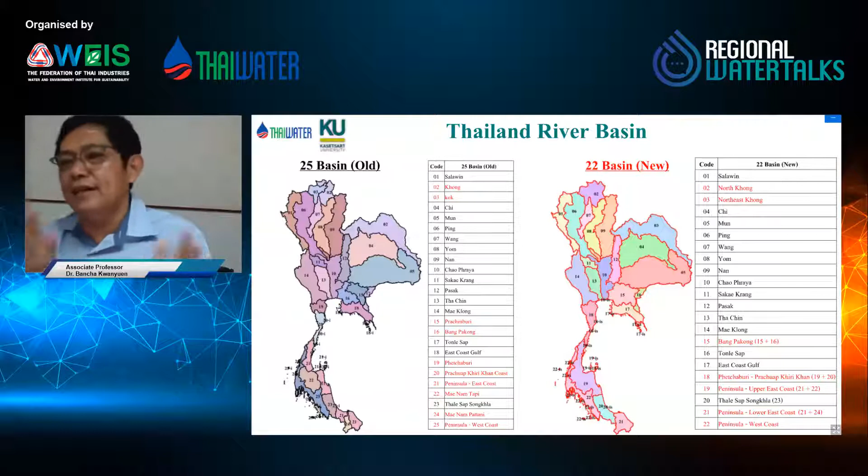The other two small basins are number 14, Mae Klong, and number 1, Salween. The Salween flows into the Andaman Sea, and 14 flows into the Gulf of Thailand. That is the new basin layout of Thailand. Okay. Next.

Yeah, I will talk about each group of them. First, Greater Chao Phraya is among the most important basins. Like I told you, it's 1/3 of the country area, and also the major production in terms of agriculture. Maybe 1/3 of the industry is here, or maybe more, and also most of the commerce in this area. Okay, and we have 4 major dams in this basin.

On the map, maybe you see on the right, on the top, that is Sirikit on the Nan River, and on the left, you can see the blue there, that is the Bhumibol Dam. Those are the 2 major dams. The capacity of Bhumibol is about 12 billion, and Sirikit is about 9 billion. That is big. And we have another 2 dams

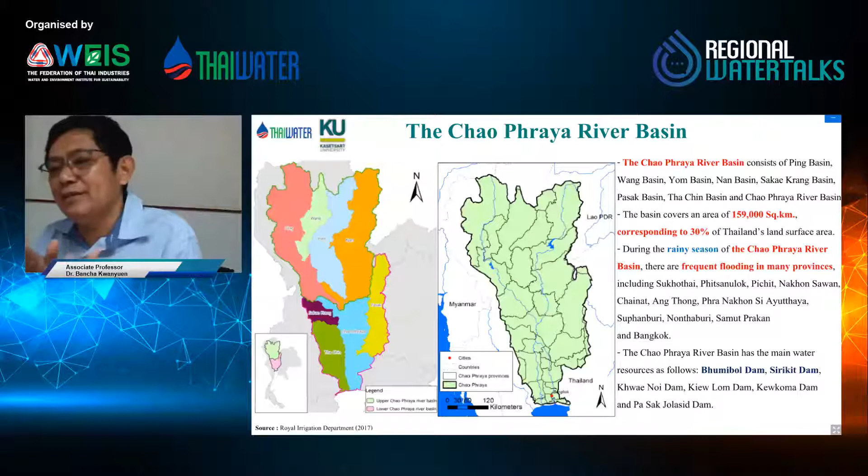called Kwae Noi. Actually, it's just below the Sirikit Dam. You can see the reservoir here, and the other one is called Pasak. It's on the Pasak Basin, on the right side of this map. Okay, so the total area of the whole basin is 159,000 square kilometers, and you can see that it's 8 major river basins combined together to be Chao Phraya. Okay, next one.

Yeah, you can see in terms of rainfall here, it's about 1,000 or a little bit over 1,000 millimeters per year. That's not so much compared to the average rainfall of Thailand, because average rainfall in Thailand is about 1,300 to 1,400 millimeters. You can see that over the 8 basins combined together to be Chao Phraya, the rainfall is not so much different. But if you have a look at the runoff, you can see that the Nan River contributes a lot.

That is about 7 billion MCM, that is million cubic meters. That's a lot. And the next one is the Ping. That is about 11 billion MCM. That is a major tributary that keeps the water. The others, combined together, still not so much water. Okay, next one, please. That is about the supply.

This is the demand side. The lower one in the brown color is the demand side, that you can compare here. You can see that the supply side comes from the Nan River and the Ping River in the north. But the demand side, you can see from the brown, on the most right hand side, on the Chao Phraya and on the Tha Chin. Chao Phraya is Bangkok actually. The Chao Phraya River goes through the heart of Bangkok, and then Samut Prakan, and goes to the Gulf of Thailand.

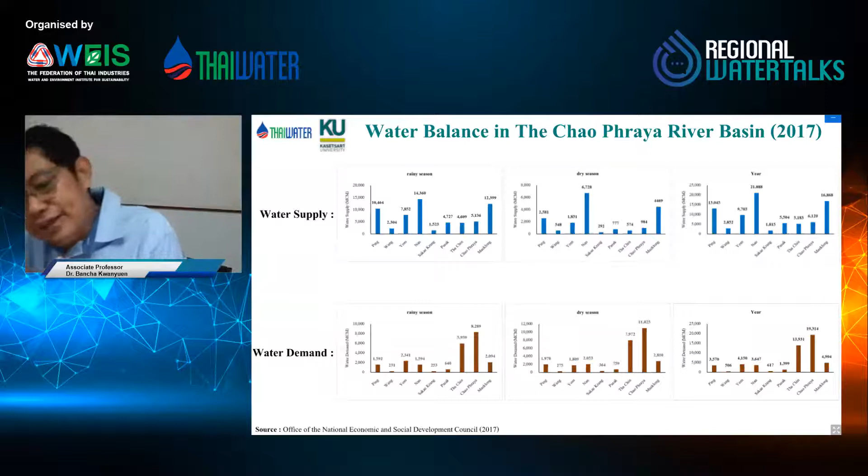And actually, Chao Phraya has one tributary called Tha Chin. It separates at Chai Nat and then goes to the Gulf of Thailand too. These two basins are the most important basins in terms of agriculture. Actually, the water use shown in this slide, around 19 billion cubic meters and 13 billion cubic meters for Chao Phraya and Tha Chin, is mostly from agriculture. I would say that 70% of this demand is on agriculture, and the other 30% mostly is on domestic water supply, on industry, and on environmental flow.

Especially during the dry season, we need a lot of water to push the salt water from penetrating into the Chao Phraya River and Tha Chin River. Okay, next. Yeah, this is about the balance. You can see that we have deficit in the Chao Phraya and Tha Chin, a lot of deficit. But how can we survive? We survive because we have the big reservoirs. That is the four main reservoirs that I discussed earlier: Sirikit, Bhumibol, and then Kwae Noi and then Pasak.

They supply the water during the dry season through the network of irrigation and the network of the Chao Phraya River, from the north to the central plain. And so we can say that the Tha Chin and Chao Phraya receive a lot of water in the dry season from the reservoirs in the north. And actually, it doesn't show on the map that one of the water supplies is from the west, that is the Mae Klong River. Sorry that I didn't show you on this map. The Srinagarind and Vajiralongkorn are another water supply that supports the Tha Chin and western side of Bangkok.

Okay, next. Yeah, next I will talk about the eastern basin. That is an important basin right now. The area is only about 37,000 square kilometers, but that is also quite big. But compared to the Chao Phraya, it's much smaller. So there are three river basins here. The yellow one there is the eastern coast, the blue one is the Tonle Sap, and let's say the brown one is

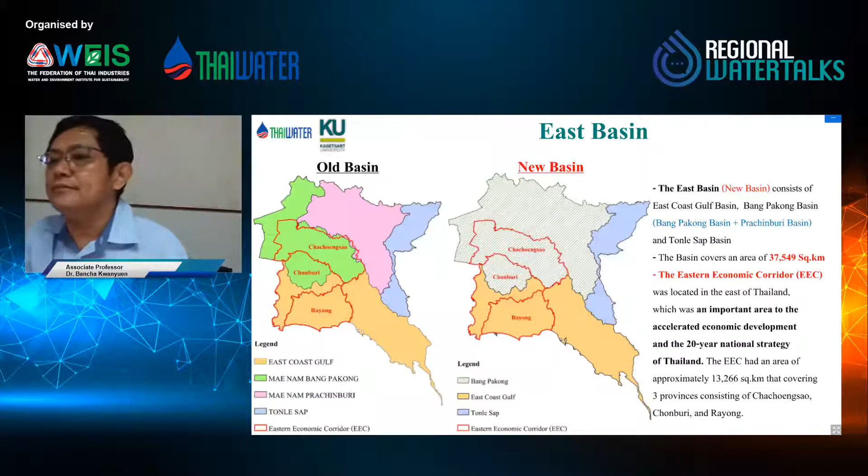This is about the rainfall. Compared to the northern or central part, the rainfall here is much more, about 1,700 millimeters per year. The eastern part, around Trat and Chanthaburi, you can see in the map that the rainfall is much more there, actually about 2,000 millimeters or maybe more. On the western side, that is Chonburi, it's about 1,000, a little bit more. Not so much, but on average it's about 1,700.

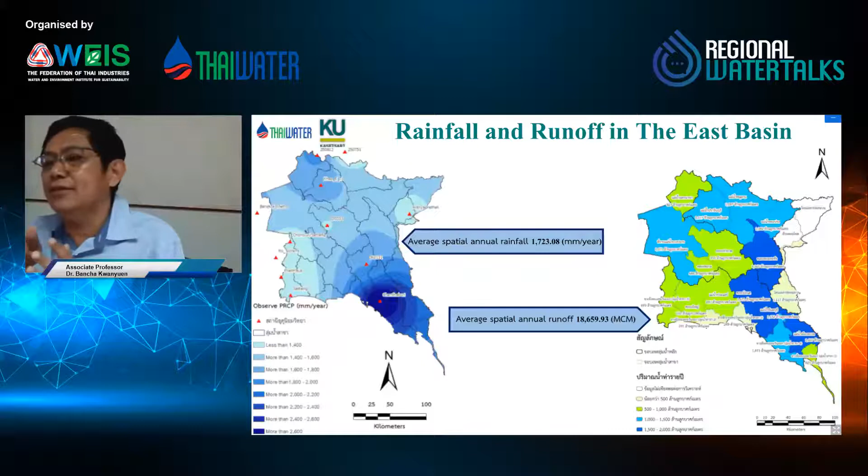Millimeter per year, and the annual runoff is about 18 billion cubic meters altogether. Next please. This is about the water demand.

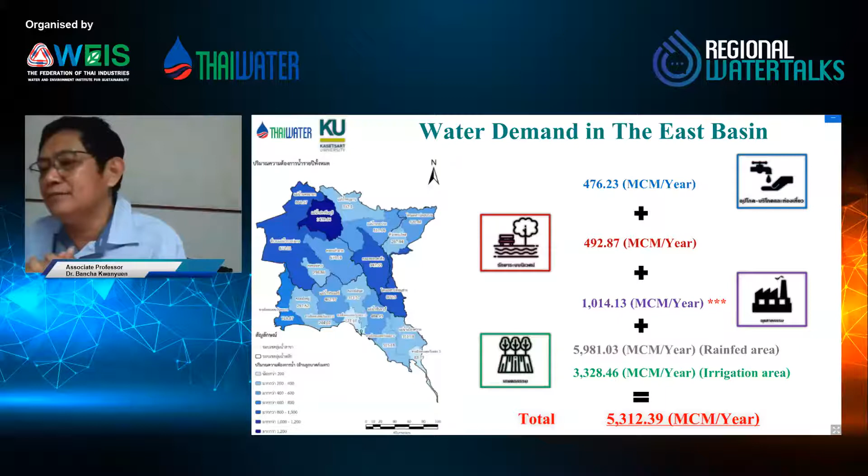The water demand here is different from the other regions of Thailand. Agriculture is about 3 billion cubic meters. Industry is about 1 billion. Domestic supply is about 500 million, and another 500 million for ecology or natural resources. So altogether we use about 5 billion cubic meters per year.

Let's talk a little more about the EEC, because I have done a lot of work on the EEC in the last couple of years. We give you some more detail here about the water for industry, the water for domestic use, and the water for agriculture.

Rayong is a good example where industry is very important. The water use in Rayong: the highest is industry, about 500 million, agriculture is maybe only 150 million, and domestic water supply only 60 million. The other one is Chonburi.

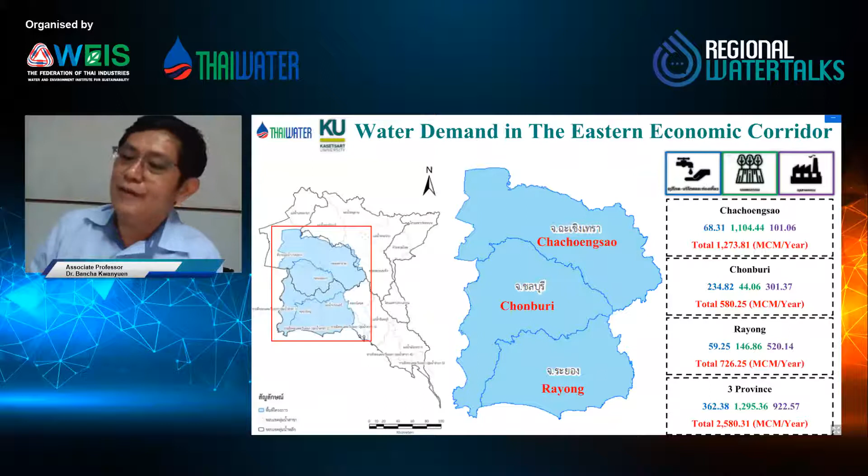In Chonburi, industry and domestic supply are not so different, 300 for industry and 234 for domestic supply. Agriculture is also less. It turns out a different story, where the majority of water use is for agriculture, not so much for industry or domestic supply, and altogether it's about 2,500 million cubic meters per year.

Okay, next please. Actually we have a little bit of water shortage in Chonburi, or let's say East Coast sub-basin number 1, that is Chonburi or Rayong, but this has been solved by the pipe network.

I'm sorry I didn't show you the pipe network here, but actually the eastern part of Thailand, the EEC area, has a very dense pipe network connecting most reservoirs together, connecting the industry area and the urban area with the reservoirs and with another river basin, diverting water from the Bang Pakong and then the Chanthaburi area into this area. So far we have no water shortage because of this water diversion.

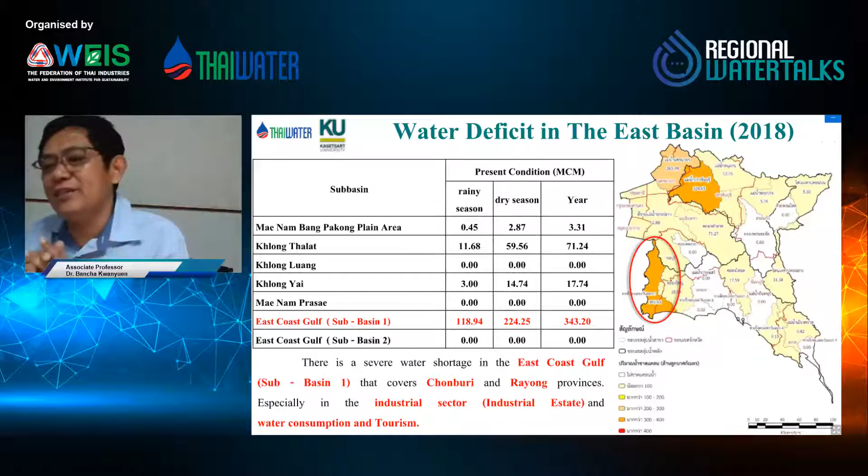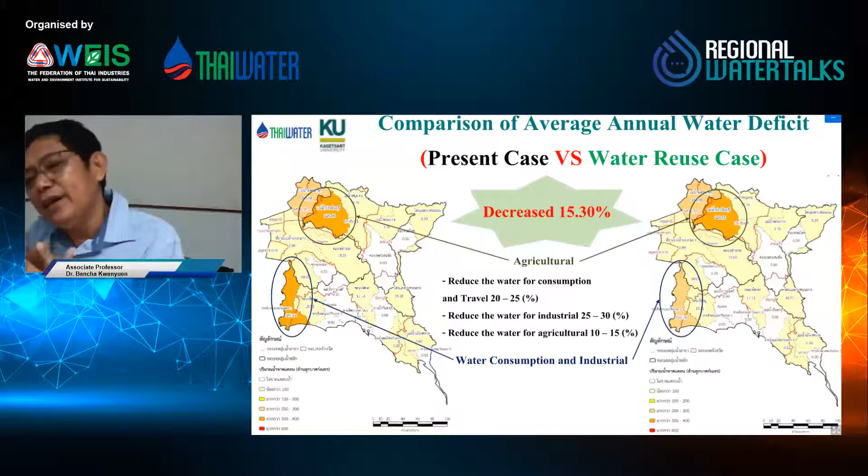Okay, next please. But what we are working on right now, we predict that in the near future, let's say maybe 5 years or a longer period like 20 years, we will have water shortage in this area. Even though we already have a plan to increase water supply, it will not be enough.

That is very important, because if we cannot do this, we have to divert more water from the nearby basins, let's say from the Chao Phraya or from Bang Pakong or from the Chanthaburi area on the eastern side of the EEC, and Bang Pakong and Chao Phraya on the western area.

In addition, if we cannot match supply with demand, desalination will be another option. We already studied that and have done work on it. So we have no problem in the next 5 years even if we cannot really reduce water use, probably desalination will be the solution. Okay, next please.

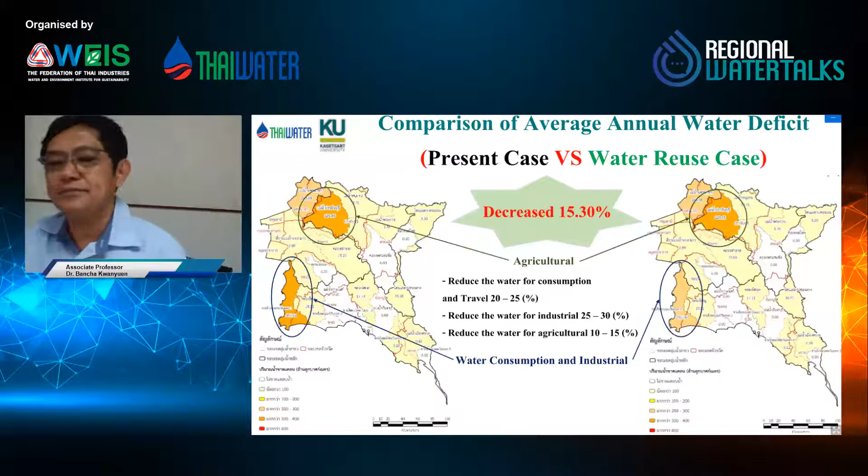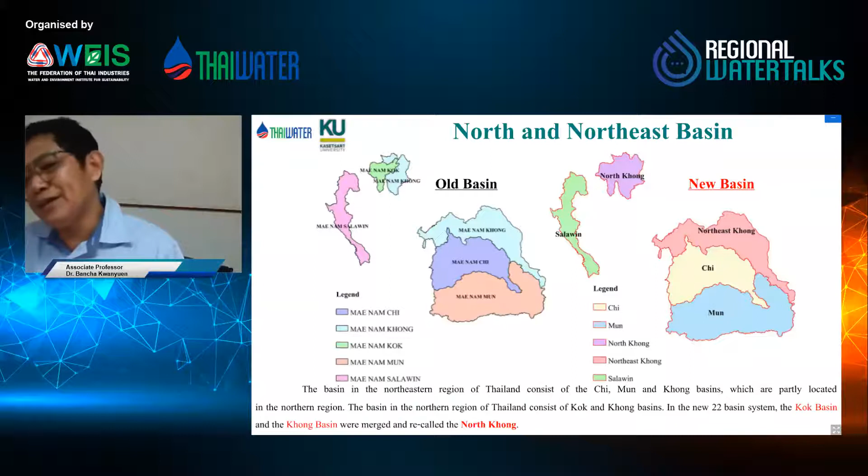For agriculture, this area is less suitable compared to the central plain and even the east. You can see the rainfall and runoff here. Rainfall is about 1,300 to 1,600 millimeters per year, and the runoff is quite a lot. Actually, you can see a lot of runoff from the northeast basin.

It's about 25 billion from the Mekong, 15 billion from the Chi, and 25 billion from the Mun. But this area has water shortage. Why do we have water shortage? Because this area is a plateau, and it's not so easy to construct a dam or reservoir.

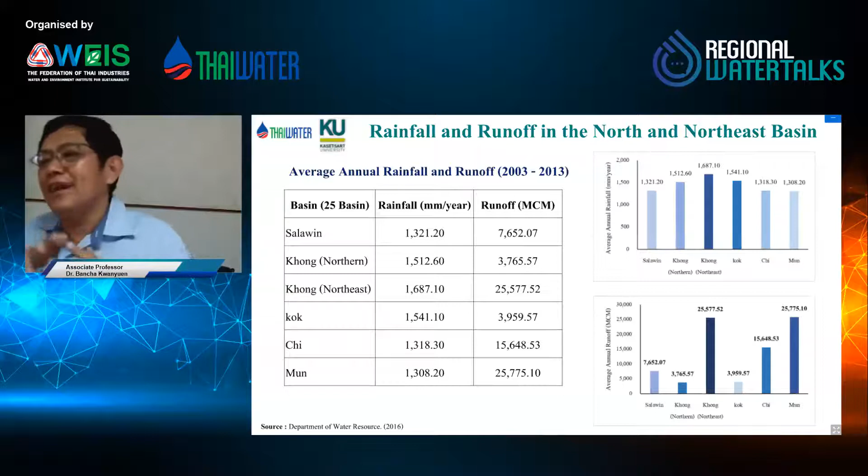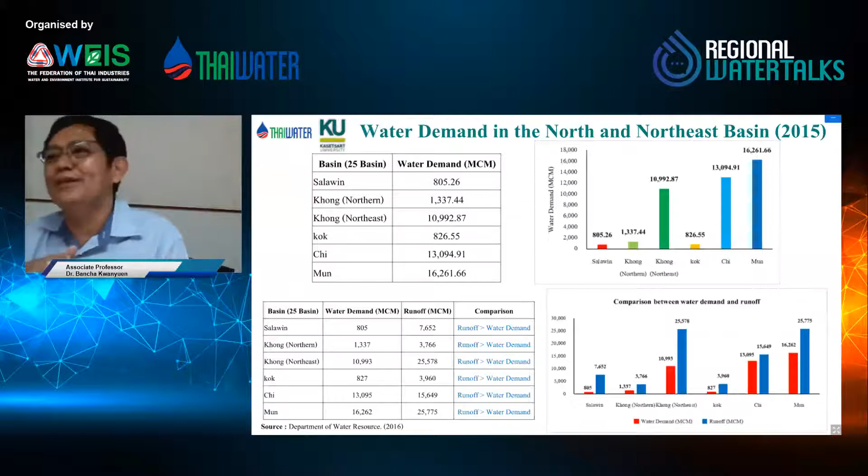Okay, that's mostly the north. I didn't talk much detail because it's mostly agriculture. Maybe most of you are more interested in industry, because industry in this area is mostly medium scale or small scale, not so much heavy industry or big industry.

Next please. The southern part is the new movement of Thailand for new industry area, because from this picture you can see from number 18 to 21 to 22, this area has good rainfall compared to other parts of Thailand, because on the east is the Gulf of Thailand, and on the west is the Andaman Sea. It connects to two oceans - the Pacific Ocean and the Indian Ocean. That's why we have a lot of rainfall in this area.

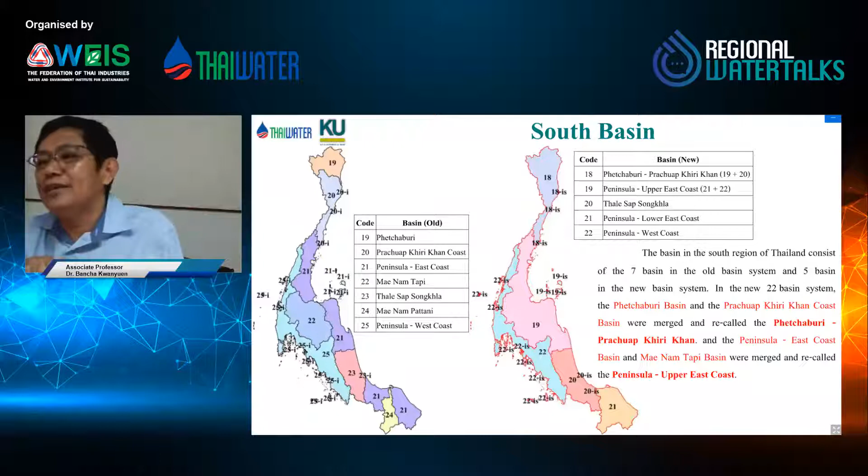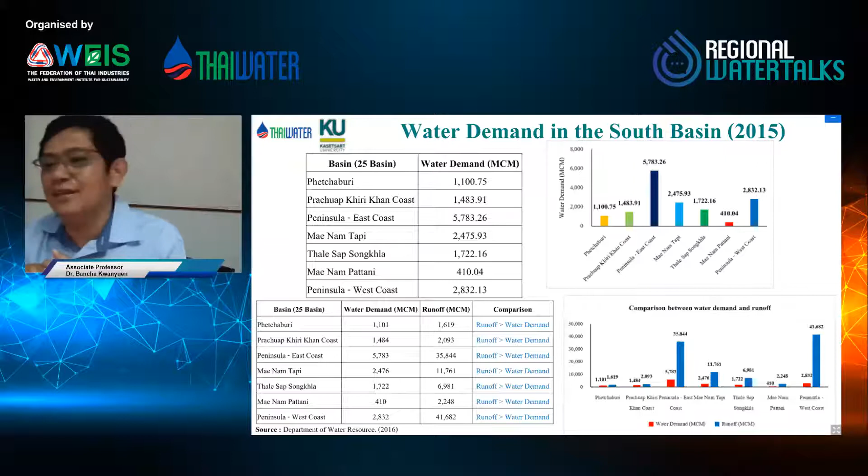In my conclusion, I would like to say that for Thailand, we try to mitigate flooding. Maybe you have heard about the flood in 2011 that heavily hit Thailand. The loss was about 1 trillion baht, something like that.

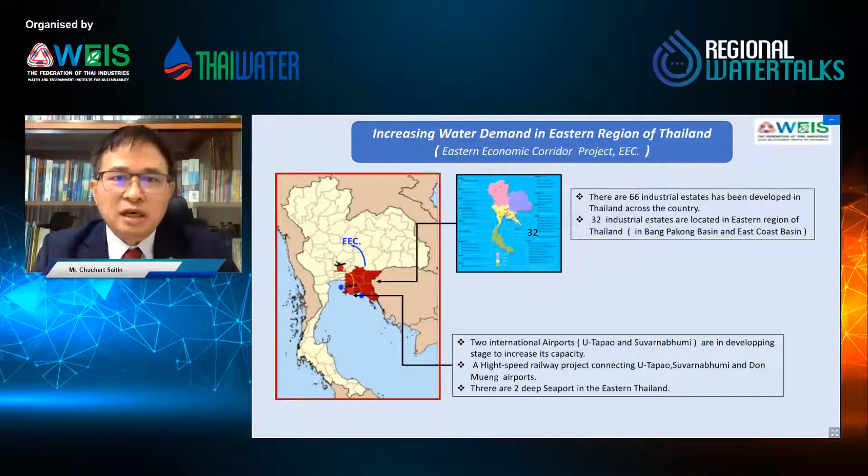This is, in my view, why the water demand in this basin will increase a lot in the near future. Please go to the next slide.

Talking in terms of the supply side, I'm talking about the annual rainfall and cycle of drought crisis in Thailand. I started working with Amata Corporation to develop the industrial park since the year 2001. Actually this industrial park started development 10 years before I joined this company, but in the year 2005, after the first drought crisis happened when I joined, it was really bad because in the middle of the year the stock of water in storage was only around 10 or 20%. It almost ran dry, but that year the rain was forecast to come another 4 or 5 months later in September.

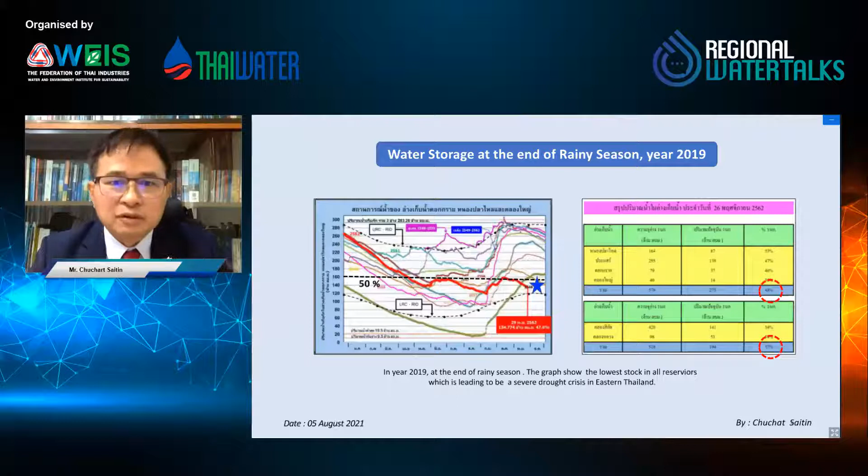You can see when we started, the amount of water in storage that could be used in the year 2020. From the beginning of the year, we can see that if we consumed water as we did normally, all the reservoirs would dry up in mid-May or the end of May. How can we manage the industry? This is talking about the whole basin.

Now, it's different for Amata, they have a water security system that I will show you in the next content. Now, for the whole basin, the reservoirs would dry up around the end of May, but we predicted that the new rain would come around August or September. So how do we get through this period?

So the way we did it in the year 2020, at the beginning of the year, was to reduce pumping water from all reservoirs, which reduced the water supply to all industry by around 10 to 20%. That is the way we managed the crisis in the year 2020. So this is just to understand how serious the water crisis impact on industry is. Okay, next slide.

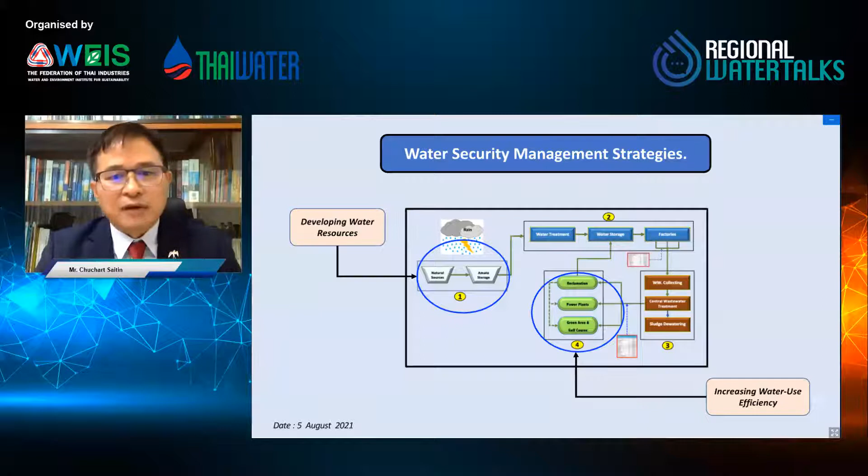Second, as Dr. Bancha told in the previous presentation, the way to have more security in the eastern part, but with water demand driven by the many projects from the government. So we have to survive by increasing water use efficiency in the industrial park, which I will explain next. So next.

The first strategy, the water resource development plan. In the water resource development plan, we study the kinds of water sources that we can develop for industry. The first one is surface water, with the lowest cost of water use. Second is groundwater. Groundwater is very, very limited in quantity in eastern Thailand. Studies found only a big basin in the Ban Khai district that is not developed yet.

Third is room to increase use efficiency, which we are using at this time. The last is the water security system, the desalination system, which is under investigation and study by the government sector, seawater desalination, to provide the highest security for all sectors in eastern Thailand. Next.

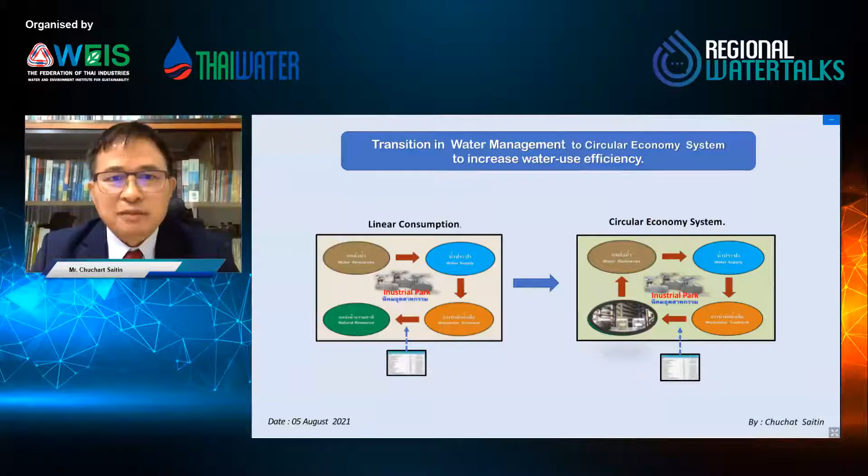When we were thinking about how to provide high security of water management to all investors, we changed the system into a circular economy system, where we collect all the treated wastewater to the wastewater reclamation system, at the reverse osmosis membrane system. And this system will produce water back to the industrial park again. Next slide.

We studied the records and statistics over 10 years, and we found that in Thailand, in two industrial estates, all wastewater is collected by the central collecting system. We found that the amount of wastewater is 44 to 58% in Chonburi, and in the Amata Industrial Estate in Rayong it's almost the same, 44 to 61%. The kinds of industry are automotive, electronics, and some like coating. The amount of water discharged from the factories is on average 50%, which goes to the recycling system. Okay, next.

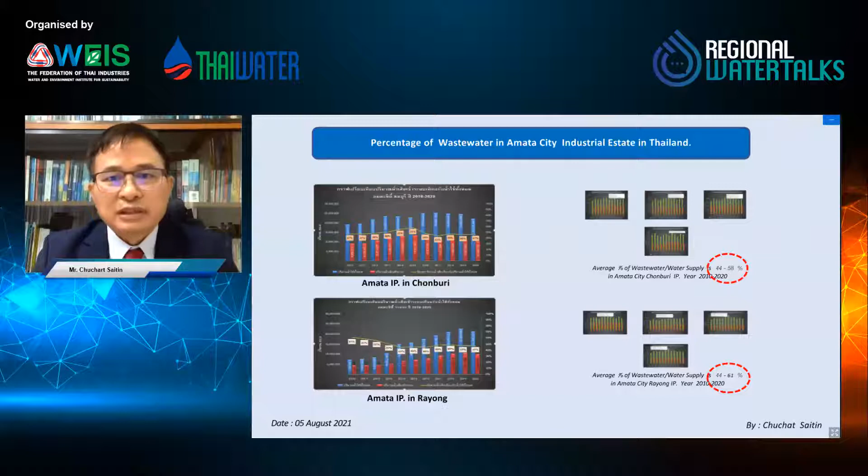In the wastewater management system, in an industrial park it is easy to manage all the factories, because all factories that invest in the industrial park have the same system. They have to design the factory to separate the rainwater from the used water that we call wastewater. All wastewater will be designed to be collected and discharged at only one point to the central water system. This design and construction is controlled by the Industrial Estate Authority of Thailand, that we call IEAT. So the design has to be approved before getting the license to operate.

When operating, Amata will have a system to do random sampling and check the discharge quality before they discharge to the central collection system. This is to ensure that all the wastewater is controlled to meet the requirements of the central wastewater treatment system. We design the whole system to handle the quality and treat until it meets the standard of water discharge to the public canal. And then we recycle this water to the cooling system in the power plant and to the green area in the park. The rest goes to the RO reclamation system and is supplied back for industrial use in production. Okay, slide.

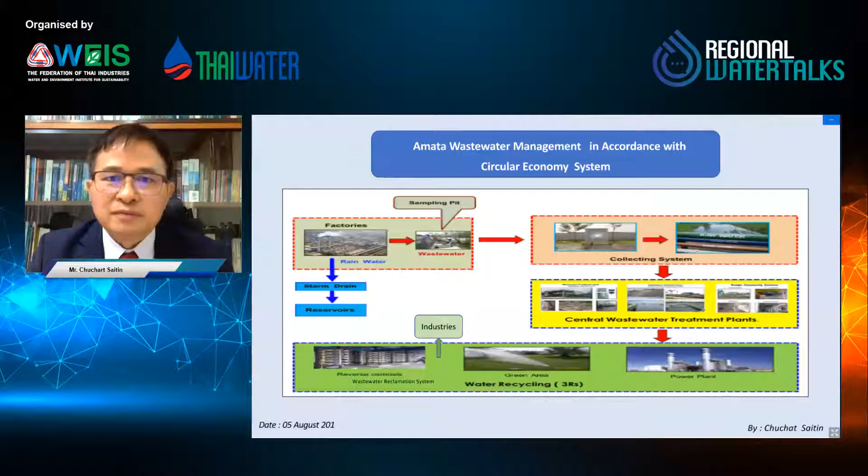Then this part is increasing capacity, the efficiency of water use, the reuse by integrating wastewater from the central wastewater system into the green area, the cooling system in the power plant, and then the reverse osmosis reclamation system, supplying high quality water to industrial use. This is the system that we plan to do. Please go to the next slide.

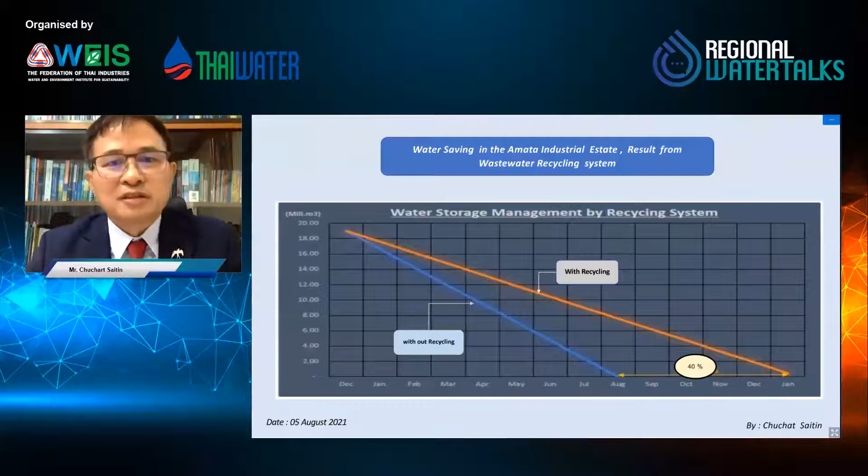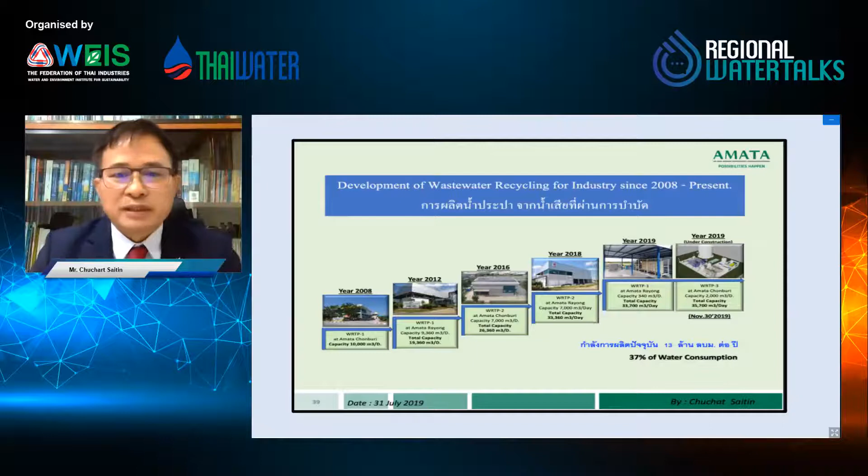So far, Amata Industrial Estate has 5 water recycling plants with 13 million cubic meters per year, and 37% of water consumption is for industrial use, but another few percent is for recycling to clean air and cooling systems. We will have about 40% saving. Okay, next.

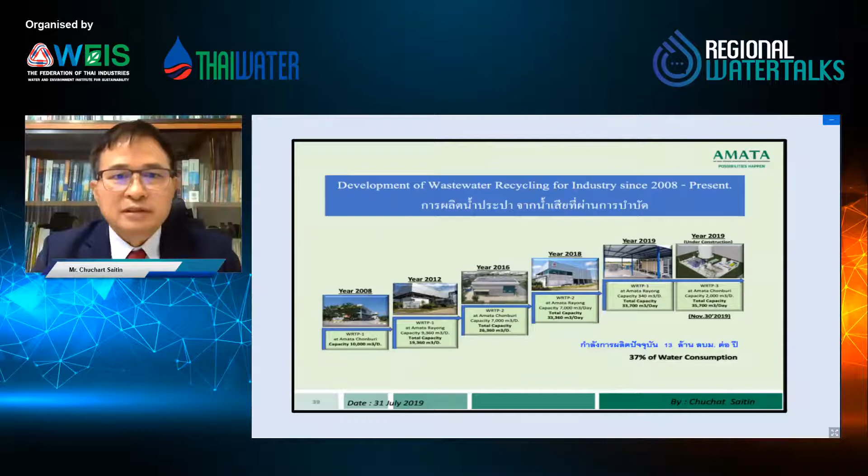This is the model I just presented to the subcommittee of the House of Representatives for Water Crisis Management in the Eastern region of Thailand, to find the solution to the water crisis on the east coast of Thailand. As Dr. Bancha said, we need collaboration between the private sector, government sector, and all sectors, including agriculture, domestic consumption, industry, tourism, or whatever. They have to be aware of the water crisis, its cycle, and how we can overcome that crisis.

Water usage efficiency improvement is one key success factor of the solution for the water crisis. Because water desalination has a high cost, it actually consumes around 4 times more electricity. Recycling water needs around 0.8 to 1 kilowatt hour per cubic meter of recycled water. But in seawater desalination, as I have the experience of visiting Israel, Singapore, Australia, where they do seawater desalination, the average is around 4 kilowatt hours per cubic meter of desalinated water. So we have to improve water usage efficiency before we go to the seawater desalination system.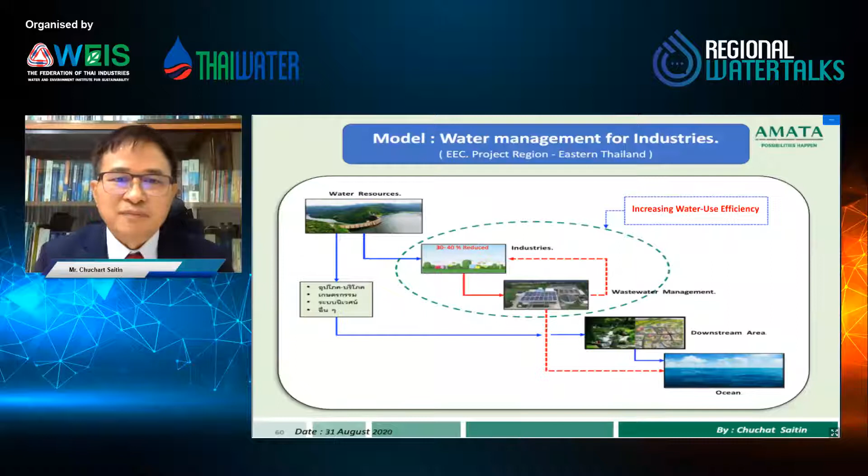I think it's coming to the last slide for mine. I just want to tell you that we have the highest security system by the government. The government has the official water resource body, the National Water Resource Agency, to manage the overall policy of water management in Thailand. And we also have the subcommittee to find how to do seawater desalination in Thailand for the highest water security in the eastern part of Thailand, to support all the projects the government has done, such as developing the seaport, increasing the capacity of the international airport, and the high speed train to the airport.

All this is driving the demand, but we have to make sure of the mitigation plan to overcome the crisis by improving the efficiency of water usage in all sectors. Agriculture, we have to reduce the losses in the distribution system. Industry, we have to do the 3R system and the circular economy to reduce water consumption. The private sector has to control the discharge of wastewater to water resources that can contaminate the source of water and reduce the supply capacity.

Because when we look at water supplies these days, it's becoming less and less obvious that there's reliable access to fresh water. There's already 4 billion people that face water scarcity today, and this number is only growing.

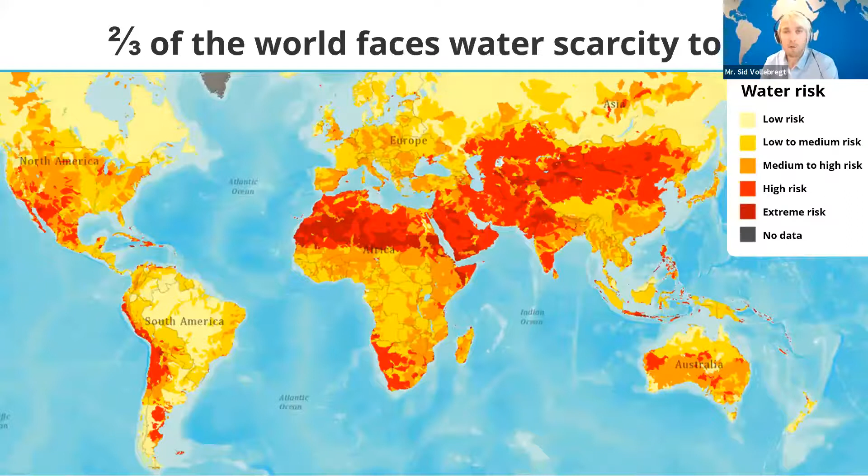And to me, access to water is the biggest challenge for humanity in the 21st century. They don't call it the oil of the 21st century for nothing. And it has to do with the increase of population, of course. We have more people that want more water. They drink more water, but it's also in the food that we consume. So basically food is 70% of our water footprint.

To grow the coffee beans that we consume in our coffees, or to grow the wheat that is eaten by the cow to be turned into meat. So it's not only the water we consume, but it's also the food we eat, the clothes we wear, the energy we produce, and all the products we have.

Well, currently, we use around 4 times the natural water cycle to provide all the people with enough water. So that means that all our natural water reserves are highly under pressure. Aquifers are dropping and salinizing, and wetlands are quickly disappearing. And that's a big issue.

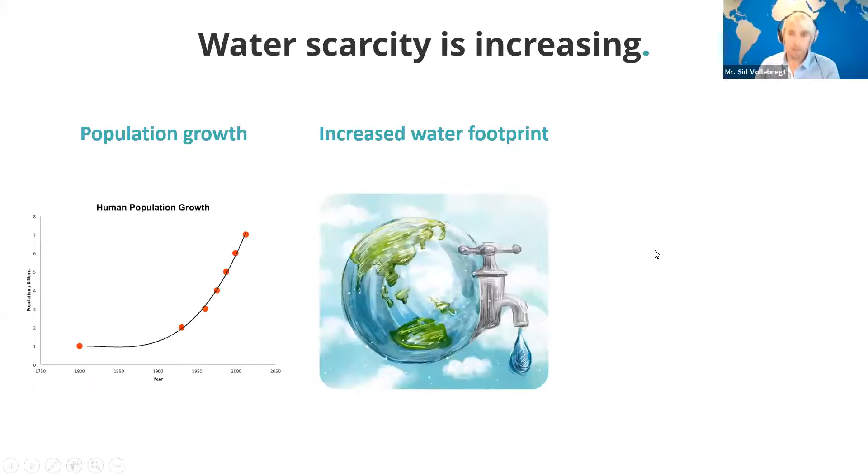And last but not least, there's also climate change that changes weather patterns. So we have longer droughts, and we have very strong rainfall in a short period of time, leaving the earth unable to capture this water. And these 3 trends together make water one of the biggest challenges for the next decades.

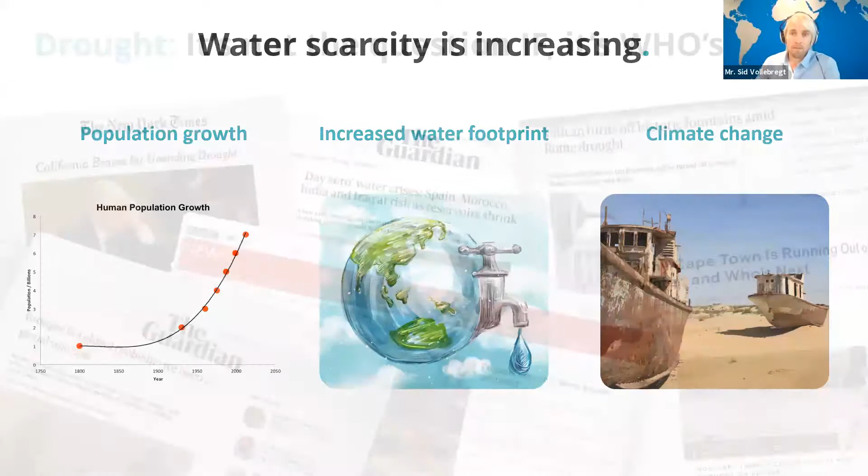But of course, this doesn't portray itself directly on people. But when you think about how people are involved in this global phenomenon, it's often these kinds of news headlines that make it evident that these days it's not a question anymore if there's going to be a drought in the dry season, but it's really who's next.

So there's always California, there's the Horn of Africa, there's the south of Europe, Taiwan has been hit recently, there's Australia, there's a lot of regions in Asia that are very pressurized when it comes to the water supplies.

But fortunately for us, if we look at the water availability, 70% of the earth is covered by water. From all this water, only 3% is fresh water. This means 97% of all the water is salt seawater. So looking at these numbers, we believe that the key to extra water resources partly lies in the sea. And this brings us to desalination.

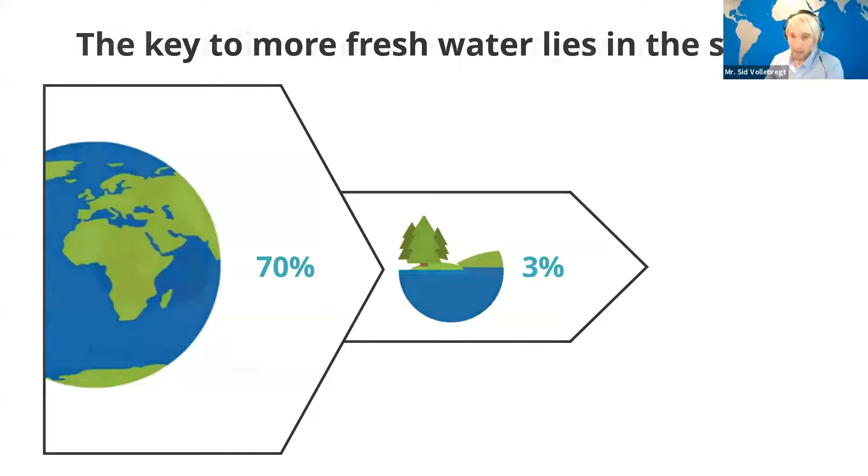And desalination is nothing new. It's been done for decades, but it's considered expensive because it's a very energy intensive process. And when energy is expensive, the water automatically becomes expensive. It's a process that has the perception of being fossil fuel driven, a bit dirty, because when we use fossil fuels for desalination, this also means we are accelerating water scarcity by increasing droughts. So we find ourselves in a vicious circle.

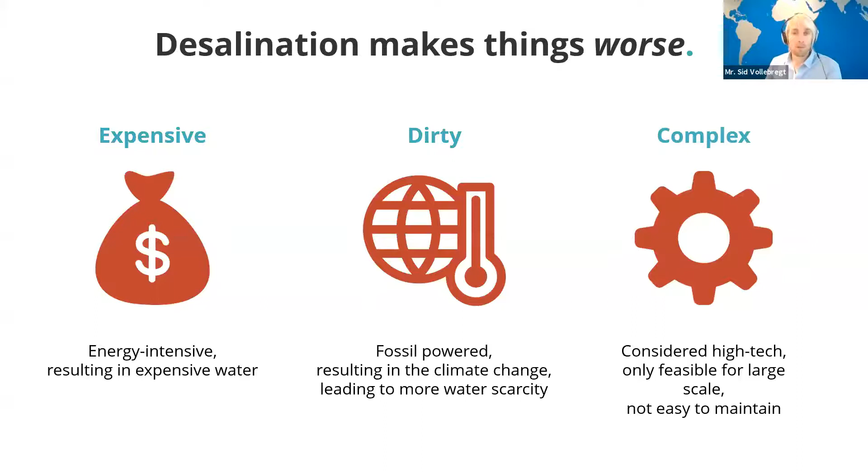And last but not least, it's also a process that's considered to be very complex, only feasible at large-scale factories in, for example, the Middle East, not being easy to maintain by smaller projects or local communities. And these really are the 3 challenges that we as an organization took, and we asked ourselves, how can we get fresh water today without limiting tomorrow? So this is the origin, this is the philosophy, these are the grounds of our organization.

And what we did is we developed new desalination technology that makes turning seawater into freshwater much more efficient. So when desalination is mentioned, we talk about reverse osmosis, which is the most energy efficient membrane-based process. It works by putting seawater under a high pressure, 50 to 60 bars, and then having fresh water being generated as the H2O molecules travel through the membrane.

For this process, conventionally and traditionally, you need around 10 kilowatt hours for a cubic meter. And that's a lot of energy, of course. What we did is we reuse the salt water flow. So there is seawater coming in the membrane, there's clean water coming out, but there's also a saltier water flow that is still present, that is still pressurized, that also goes out and goes back into the sea. This is called the brine flow.

And this brine flow still contains the 50 or 60 bars of pressure that you originally put on the membrane. And this energy we reuse using an energy recovery device, abbreviated as ERD in this picture. And by doing so, we are able to use 70% less energy. So we reuse the saltier water flow, we take its pressure, we provide it to the pump, kind of like a turbocharger. And this allows us to use only 3 kilowatt hours for a cubic meter of water. So that's 70% less energy.

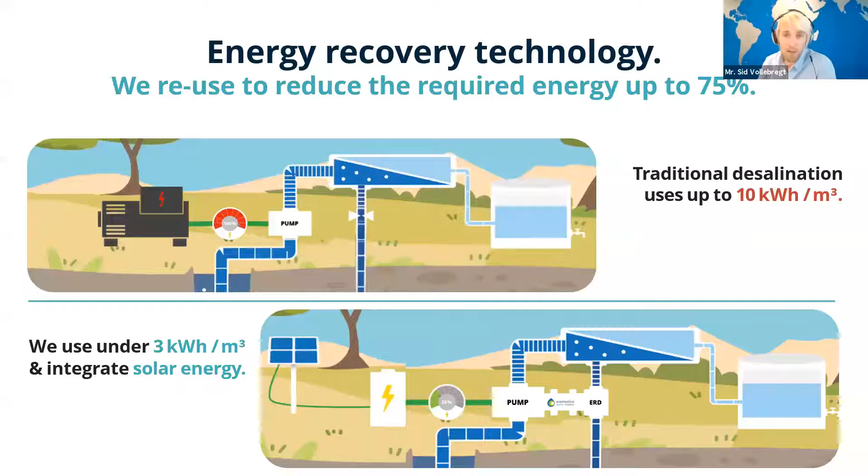The second step we do is we integrate this water treatment process into the fluctuating nature of renewable energy such as solar energy. So we are able to use the sun with a small battery bank to power this desalination process in off-grid locations. And due to this innovation, we also need 70% less panels.

That's what makes a major breakthrough, which makes fresh water at coastal locations possible for everybody these days. So what we offer with our solar desalination technologies is, first and foremost, water at lower expenditure. When you have to transport water, it can be very expensive, so what we do is generate water on site at lower expenses, and we make sure it's produced in a sustainable fashion using solar energy.

Reliability is very important because you cannot operate a resort, an industry, or have a community or private property without water, so reliability is of utmost importance. And it has to be easy to maintain using remote monitoring and durable components - really high grade, not RVS steel because it erodes away within a year, but titanium pumps or 904L, robust materials. Durable components, automation and remote monitoring together are the key for a long-term and sustainable project that saves on water expenses.

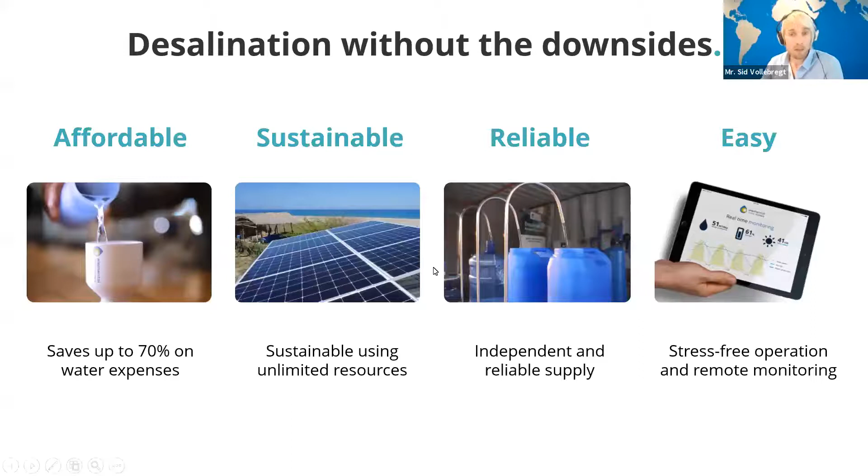So we think there's really a big opportunity here that we are happy to jump onto with the right local partners. When we dive a little bit deeper into the technology, we have 3 types of solutions that we can deploy, generating between 3,000 and 500,000 liters of water per day - that's 3 to 500 cubic meters of water per day. That's the sweet spot that our organization operates in.

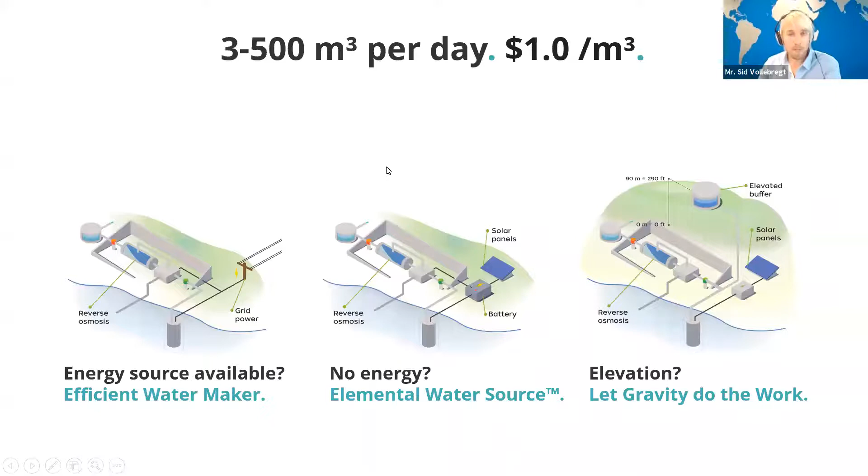We don't do larger plants and we only do seawater desalination, so only coastal applications. For these kinds of numbers, you talk about roughly $1 to $2 for a cubic meter of potable generated drinking water - that's the range of investments you have to think about for all of these solutions. So we have 3 different solutions that we deploy, let's zoom into them quickly.

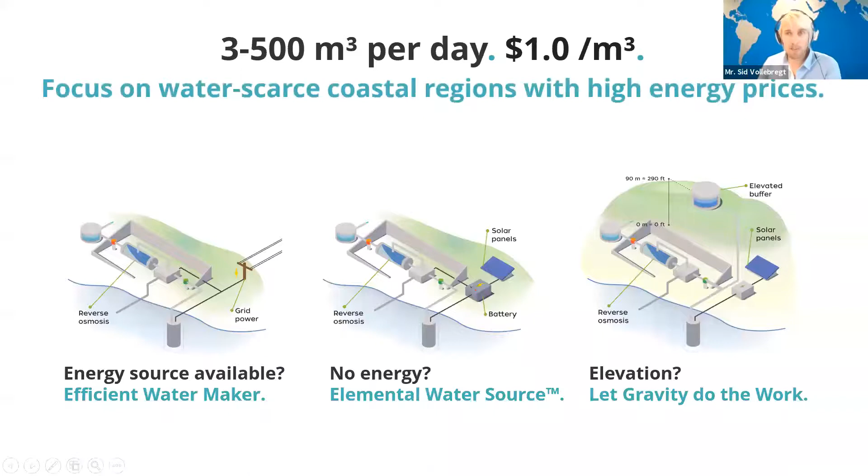They're all in water scarce coastal regions, and the payback is shorter if energy prices are higher. The first solution is only the water treatment part, the efficient desalination range we have, and here we deploy containerized or skid-built units. In the picture you see, for example, a project of 90,000 liters per day, the desalination device and remote monitoring. They only use 2.7 kilowatt hour per cubic meter.

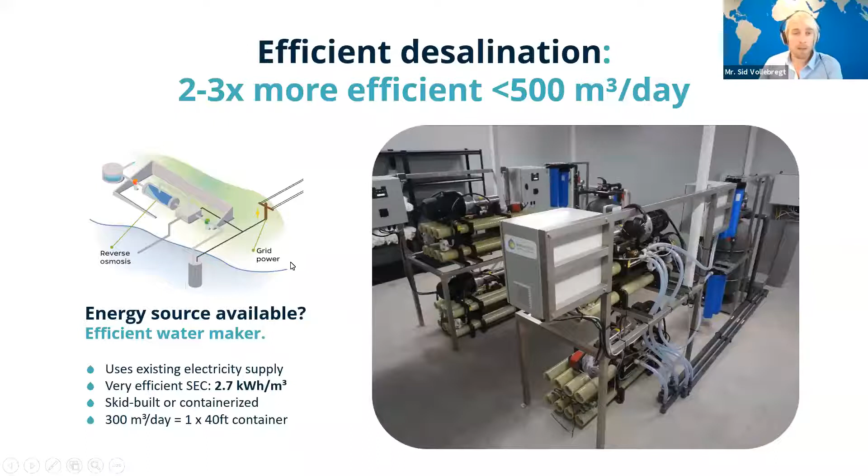This uses the existing electricity supply of the client. So if there's a resort, a community, or a private property that already has reliable and affordable electricity, these are the units we can deploy - either skid built or containerized. We can do 300 cubic meters per day in a 40-foot container.

Comparing the economics to conventional desalination, which has the perception of being expensive, here you see 2 lines of the investment required, over time. The conventional desalination systems have a little bit lower investment required, but because of the energy required, the operational expenses are quite high. Looking at our system, the light blue line, the operational expenses are much lower, leading to short payback and strong savings over time.

You see that represented as well in the water tariff. If you calculate these numbers over 15 years, the amount of electricity for the traditional systems is much higher, so you're looking at $4 per cubic meter. But with our system, we're below $2 per cubic meter. And this is for a system of 10 cubic meters per day.

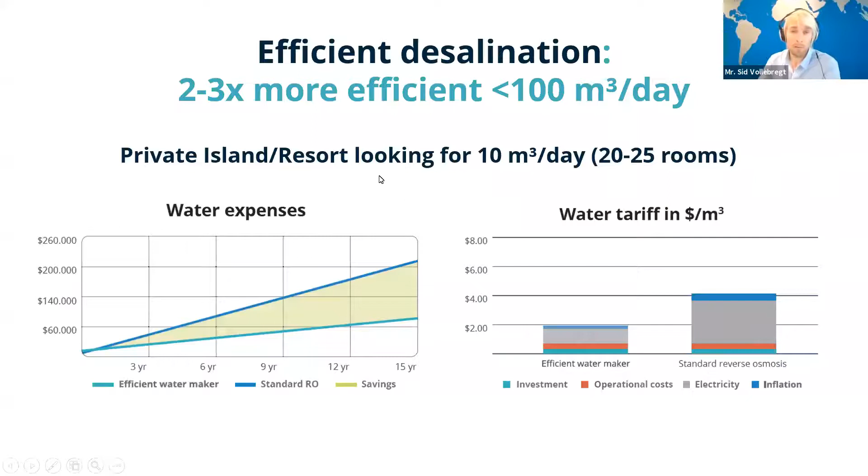This, for example, makes 90,000 liters per day for the guests. And it saves the client over 60% compared to a previous water supplier. So that's, of course, reliability, sustainability, and then also savings all at once.

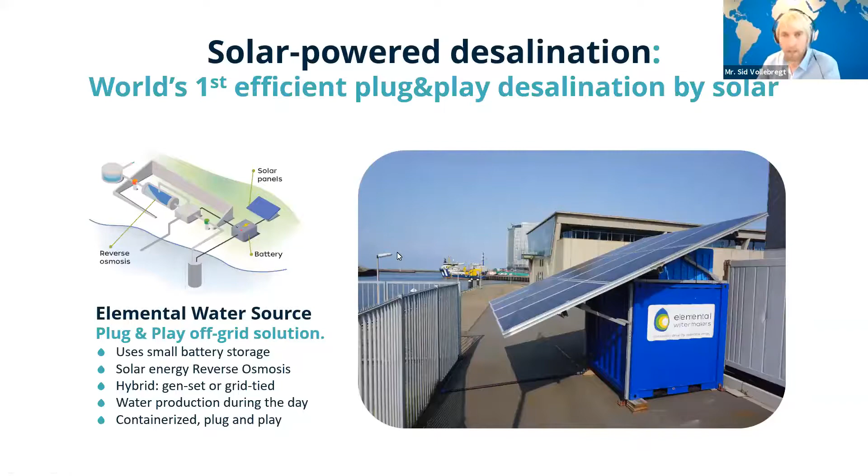And I brought a little video with me that shows you a little bit more about this process. So let's take a look at this video.

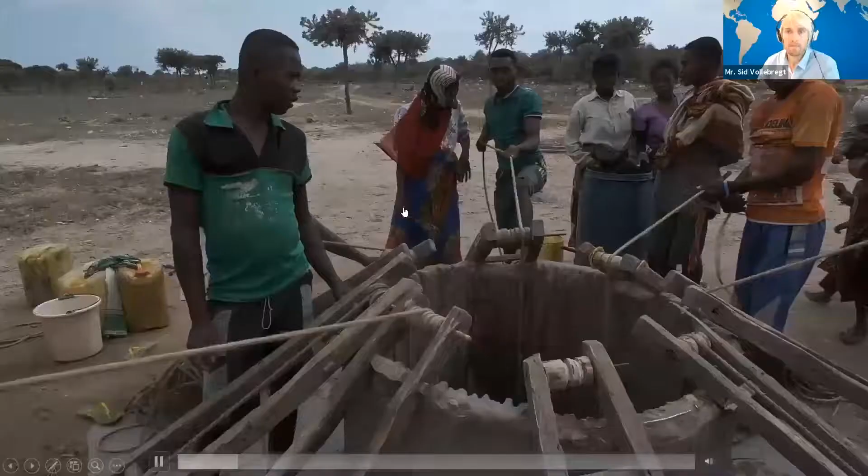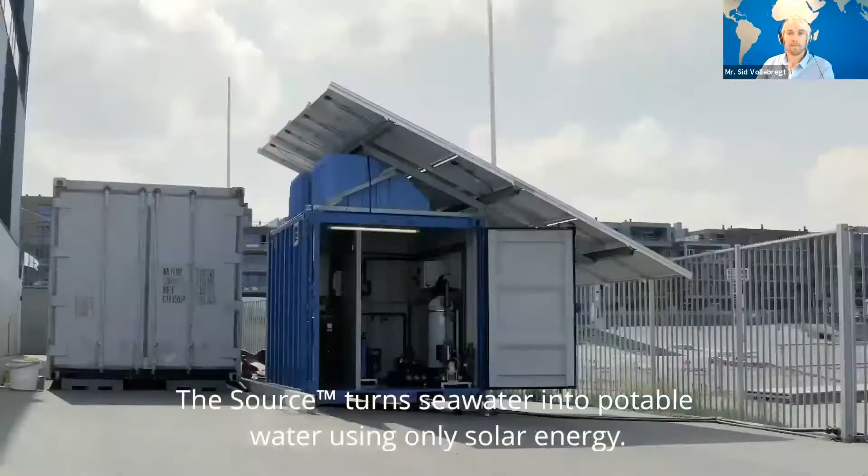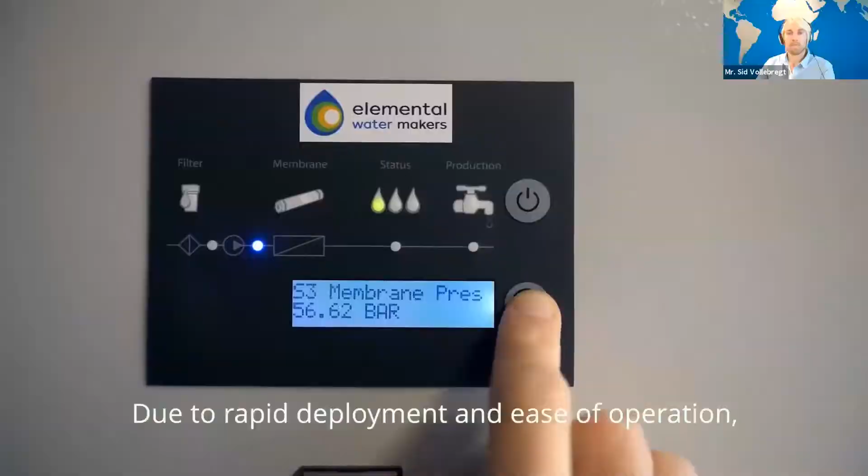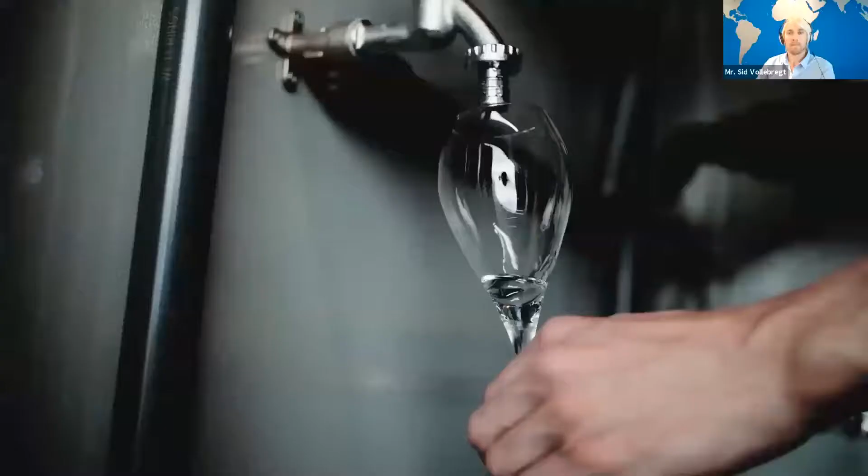Water is the source of all life. However, fresh water is getting more precious by the day. Many islands and coastal areas are facing water scarcity. How do we ensure sustainable access to clean water? At these coastal locations, there are two elements abundant: the sun shines over the vast ocean. This is where the elemental water source makes the difference. It offers an easy-to-deploy water solution for any off-grid location. The source turns seawater into potable water using only solar energy. It's the world's first efficient solar desalination solution suitable for quick deployment. One elemental water source provides sufficient water for off-grid users, such as communities, resorts, industries, or private properties. Due to rapid deployment and ease of operation, it's also the perfect water source for emergency response and disaster relief. It uses 3 times less energy than traditional desalination by unique energy recovery technology. This ensures that the water can be enjoyed at an affordable rate. Tap into the elemental water source and ensure clean water for generations to come. Join us in solving freshwater scarcity using only the sea, sun, earth, and wind.

So this elemental water source is a containerized off-grid solution. It finds suitable use in off-grid locations, such as for a community water kiosk, but also for temporary applications like in emergency response situations after a disaster or a cyclone has hit.

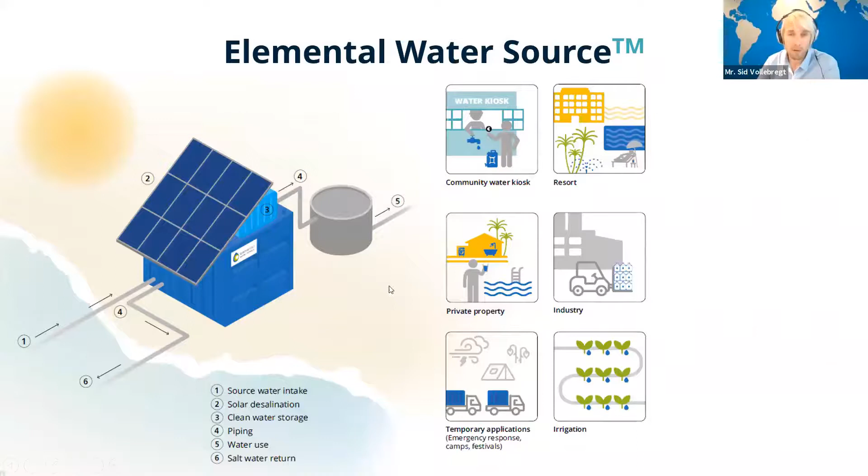It is possible to quickly deploy these units, but of course for other off-grid applications such as private properties, resorts, industries, or irrigation, this is also a very suitable solution, as long as there's access to the sea. As I mentioned, they come pre-built, pre-mounted in a small container. Of course, it really depends on the size of the water demand for the clients.

So we can do small-scale systems like 5,300 liters per day. They come in this 8-foot container. But of course, as the water demand increases to 10, 20, or 40,000 liters per day, also the size of the container increases. So all we need to know for the location is really how much water they need and what their location is.

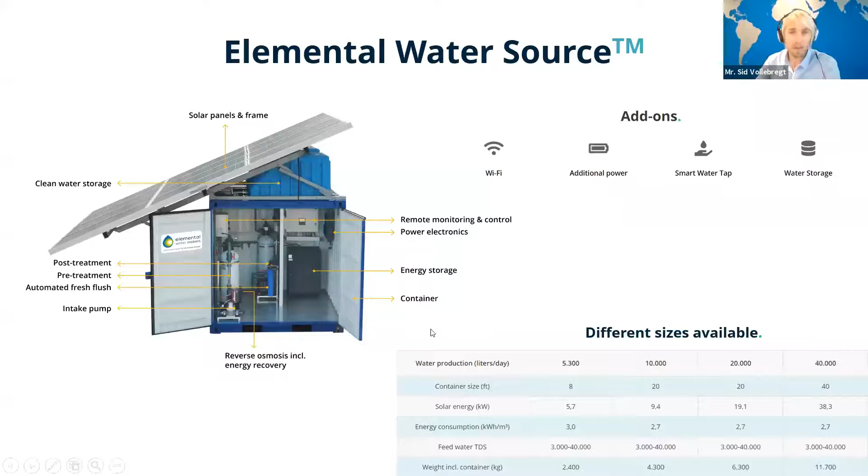This allows us to really quote a custom project, design a custom project, taking into account water quality parameters, the usage of the water, but also the local solar radiation. So this produces water, but this can also be extended with additional power for energy appliances, smart water taps for distribution, water storage we can implement, and also Wi-Fi. So this is a very nice application for off-grid locations.

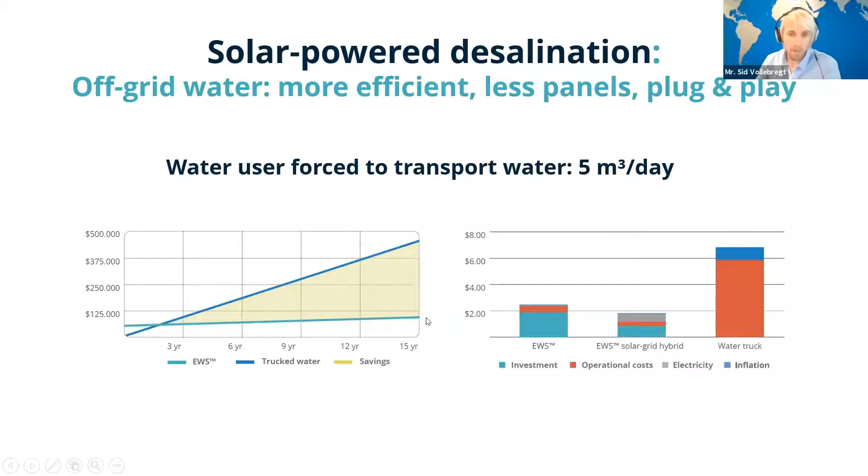As I mentioned, it's mostly for places that are now receiving trucked water, for example, through water trucks or boats, or places whereby people are carrying jerry cans, jugs, or water bottles. Once you start transporting water, it becomes very expensive. So if you are at a coastal location that is transporting water, I recommend contacting us so that we can make these kinds of cost-benefit calculations for you, because I'm sure that the payback is short, as you can see here, and the savings are significant, besides the reliability and independence of it.

As I mentioned, we do already do some projects in the region. For example, in the Philippines, we work together with a local partner, Next Level Water, and with them we are deploying water kiosks. In these water kiosks, people are employed to operate and maintain the system, and thereby they sell and distribute the water, and by doing so, they can earn their income. So there's also economic growth that can come with such a technical solution.

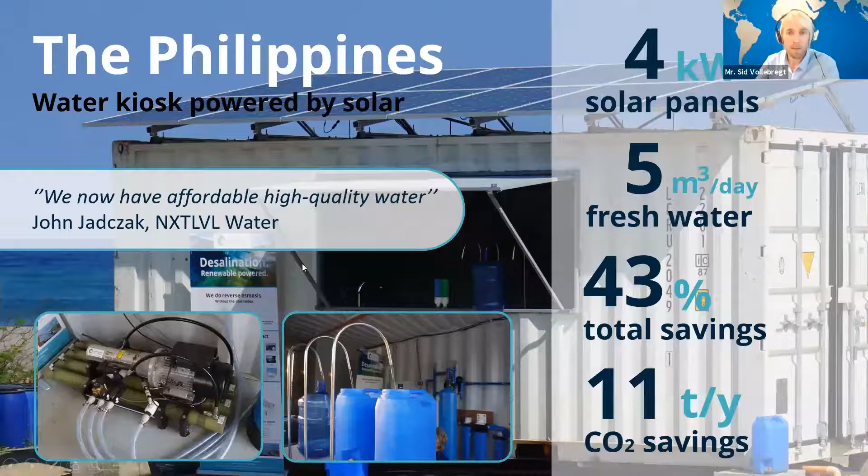So here you see the water kiosk model. It's also suitable for impact investments, also by bundling more projects from more islands. This makes project financing also possible. So these are models that we are also very eager to explore.

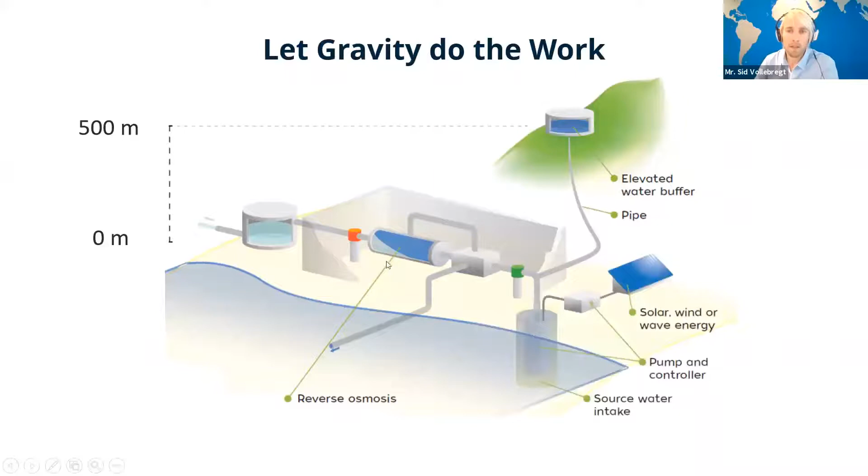The last solution we do is a gravity-based solution. Instead of using a battery for energy storage, we use potential energy. We needed 50-60 bars for seawater desalination, so imagine pumping seawater to a vessel of 500 meters height provides sufficient elevation for the process. If we use a solar pump to fill up the seawater tank, we can constantly desalinate water. We also added an energy recovery part that limited the amount of elevation needed by 80%.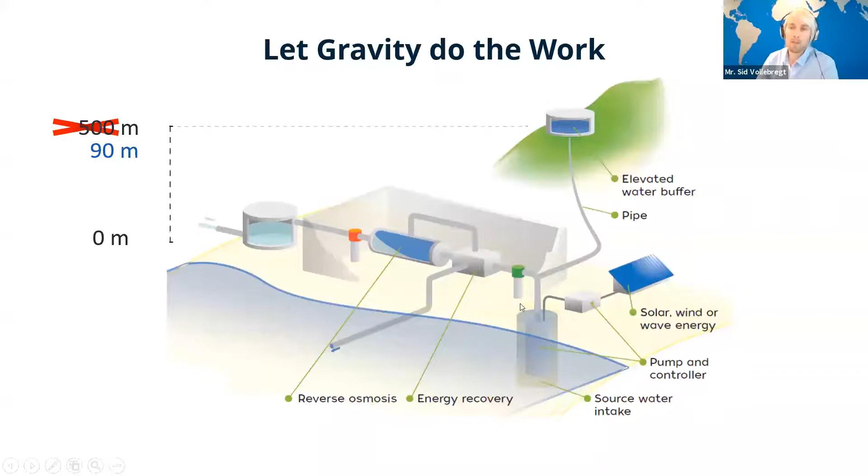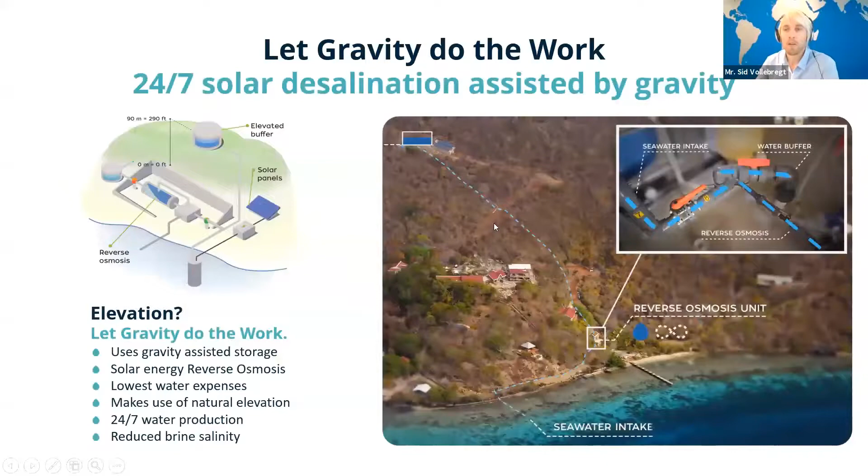So if there's a hilly coastal region, we can do with 90 meters, and constantly turn seawater into drinking water while only using fluctuating energy from the sun. This is only possible in places with that natural elevation, of course. This is a project we did in the British Virgin Islands that generates around 12,000 liters per day, and the nice part is there are no energy conversion losses, so it's really suitable and efficient.

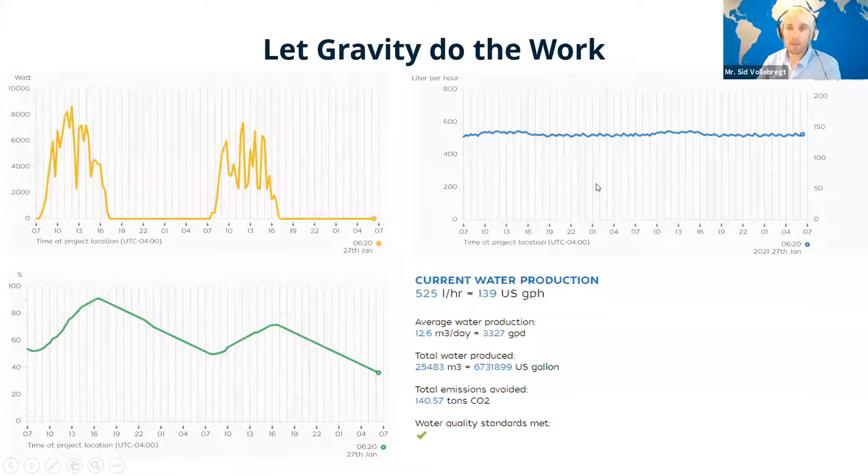So you see on the graphs that using only solar energy during the day, sufficient water is pumped up towards the elevated water storage tank. Then, by constantly making water through the desalination process, the reverse osmosis, it's possible to provide constant water 24/7 while only using fluctuating solar energy. That's kind of cool, but as I mentioned, you do need the elevation in the natural surroundings. The economics here are strong too.

I think it's good to mention that desalination always has some negative aspects - it's always about the brine. It's good to mention that brine is basically the same water you took from the sea, but in a more concentrated version. What we do to overcome issues with the brine is run on a low recovery ratio, so the concentration difference between the brine and the original seawater is limited. We can do that because the energy recovery device has efficiency over 99%.

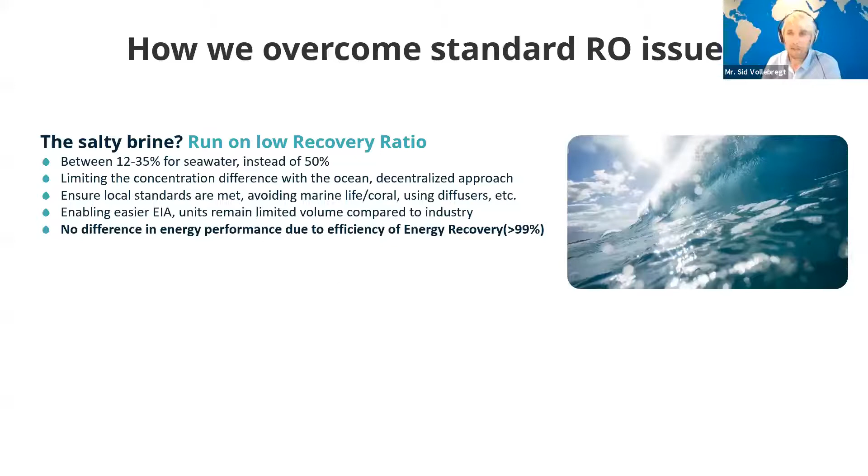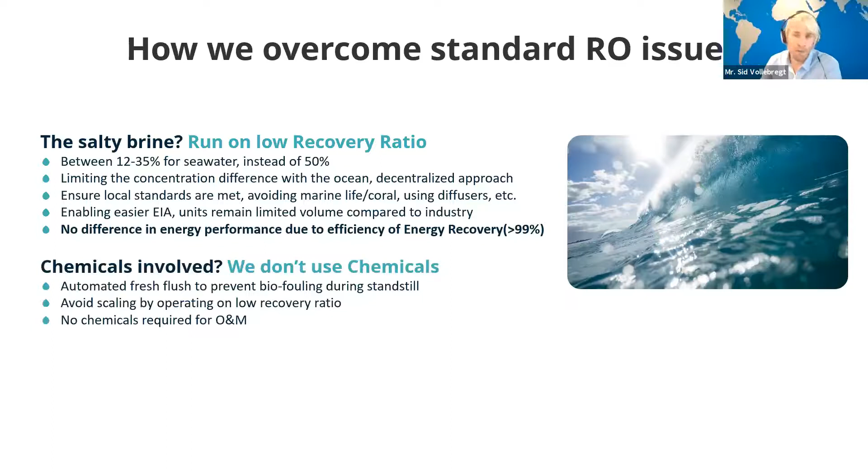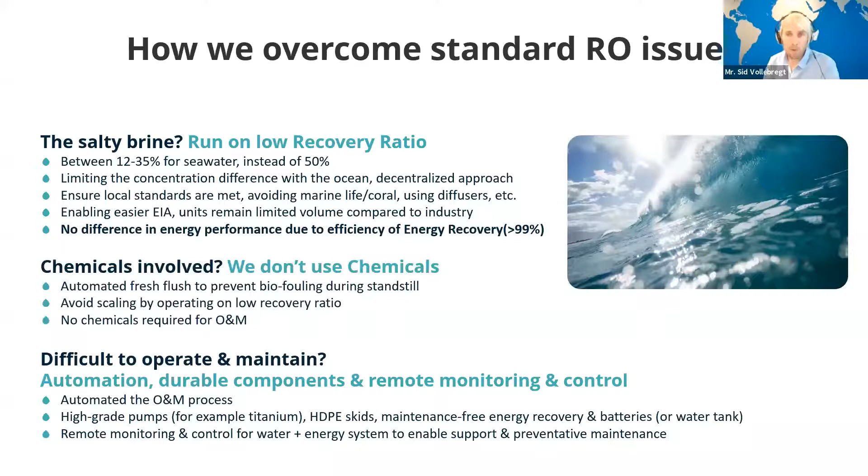So the brine is of lower concentration, making it easier to return to the sea, and it doesn't consist of any chemicals - we don't use chemicals to clean the membranes. There are automated fresh flush cycles involved when standing still, so no chemicals are being returned, just slightly saltier seawater that goes back into the ocean. And as we already said, for operation and maintenance we train local people and local staff to operate and maintain, working together with local partners to provide support. We also have remote monitoring, durability, and automation integrated into the system.

The last solution we recently deployed is really for emergency response. It's called the elemental water response. Imagine there's a situation where the water supply has been affected by a major event - before, people had to fly or truck or transport jugs of water, but what we developed is really portable solar desalination devices. You can see them here. They weigh around 30-40 kilos and can be put in airplanes, so they can be ready at strategic locations.

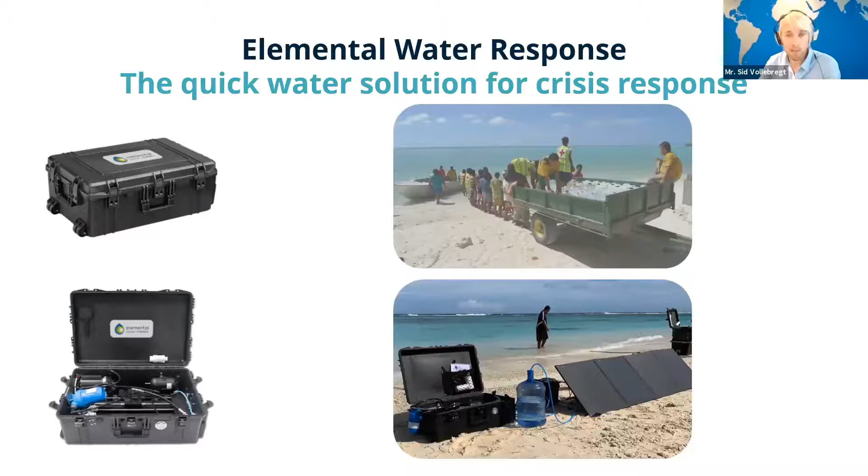One of these cases has the solar energy part, the foldable solar panels. The other case has the water treatment. Just by putting the hose in the seawater and folding out these solar panels, you're able to produce around 50 liters per hour. This is very suitable for first phase emergency response, so we are also supplying these to local governments.

So what we say is water for all - we do a lot of work for resorts and commercial properties and industries, but also together with NGOs for remote communities, and together with local governments for remote communities that don't have access to safe water, SDG 6. So we are interested to hear from you what markets you would like to work on.

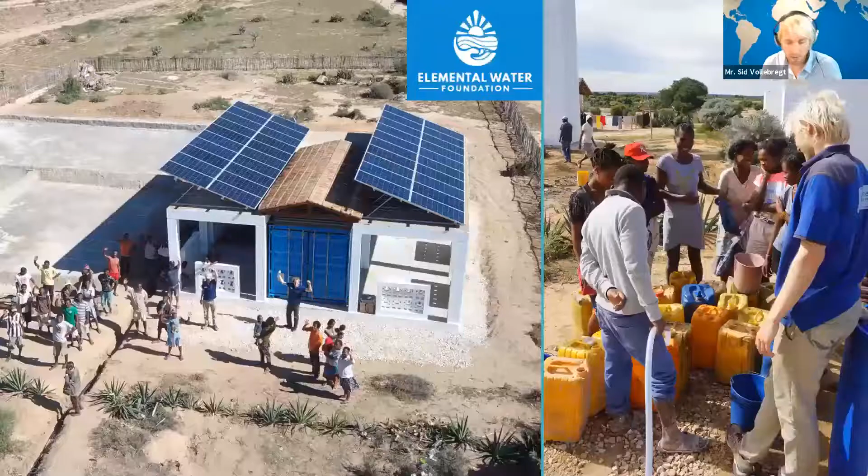I think it's also important to say that we started this project really in Madagascar with the inspiration, and we also started a foundation that brings back water to Madagascar. Madagascar is currently in a very severe drought - a lot of people are suffering, but we have a foundation that raises projects and donates them to the local people there. This is a picture we did two years ago for 3,000 people for the water supply, and we're going to do much more of these kinds. We're very proud to work for those people.

So let's work together on that to solve freshwater scarcity using only the sea, sun, earth, and wind.